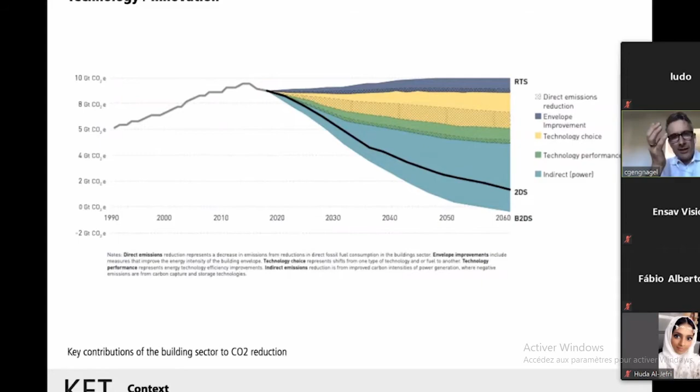That means we really have to stop this, and we have to find completely different answers for how we build human space. We really need a turning point in creating physical space. That means we have to change in an absolutely dramatic way, more than we changed 150 years ago.

And one answer is the use of technology, and one answer is innovation, of course. So if you're looking at what are possibilities to reduce the CO2 emissions, there's one answer: that technology can really help us to solve this. That's a key contribution in this challenge, as is the question of resources.

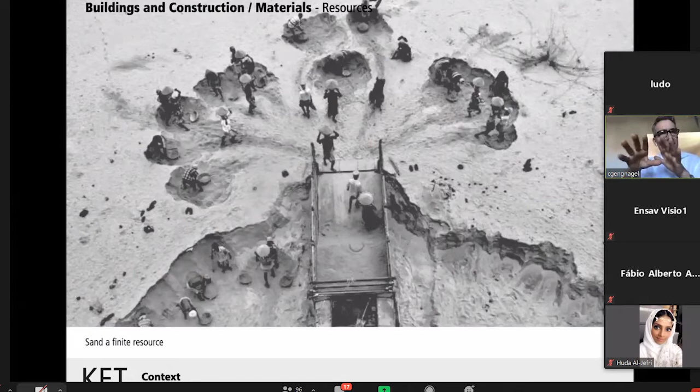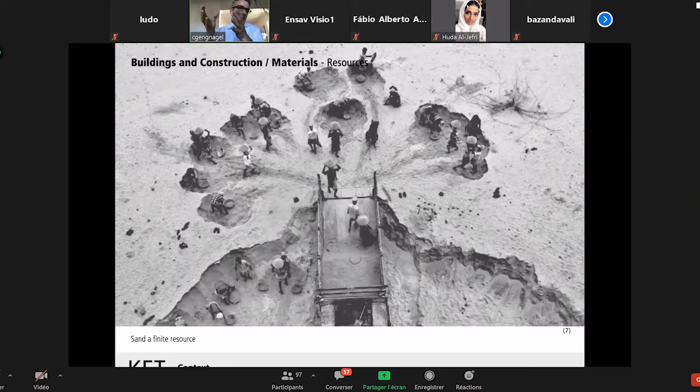If you're looking especially at concrete and reinforced concrete, I think it's more and more common knowledge, but it's still not really in our practice. I think we don't really realize in our practices at the moment that sand is a finite resource. It means we have a real problem on a global scale with this simple material, sand. It's a very present problem in the Asian part of the world, maybe not in Europe, but we have to see this as a global question, and think about how we can dramatically reduce the incorporation of sand in all this production of physical space.

And the interesting thing is that we have to do this much faster than we do it at the moment. We must become better and faster in what we do, and we have to do it right now.

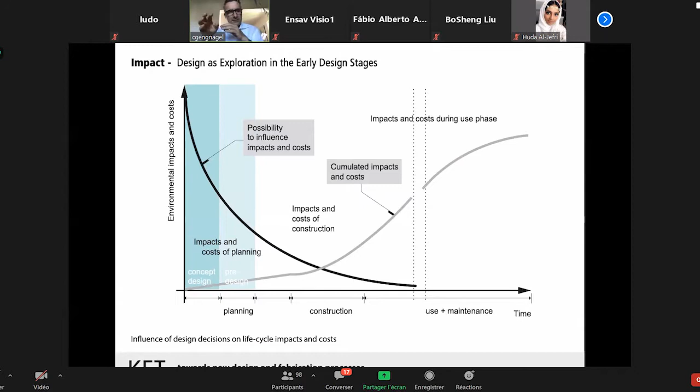So I think as an engineer and an architect, the best answer is to really change the way in the early design stage how we design buildings, because it's also quite common and well-known analysis that the impact of design concepts on the reduction of material consumption and emission of energy and CO2 has a very great impact in the early design stages. And you lose more and more of your possibility for real impact as the design process goes further, and then cost and material start increasing more and more.

That means our aim should be to do what we have to do in the early design stages. And if you're looking again at our daily practice, you can see that we are not there at the moment. We don't spend enough time in the early design stages. We're starting too fast, with design concepts not really well analyzed, starting too early with the realization process. So this is, I think, a very common problem, and this is, I think, also our idea and our hope that we can change this very fast, because it's just a changing of a process.

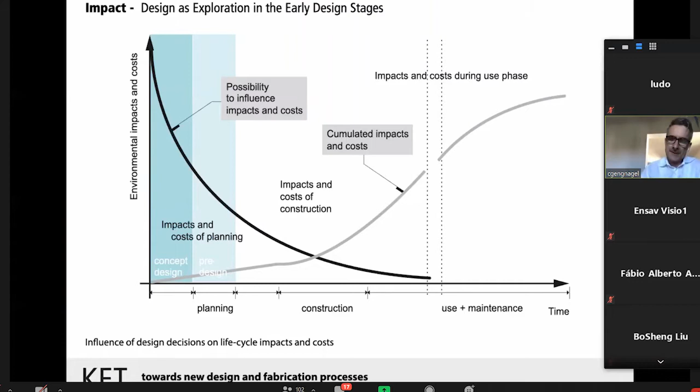The second idea is that we really have to come to a multimodal design in architecture and engineering. That means we have to use computation as a method to answer a complex network of questions at the same time, and do it in an iterative way. We have to answer mechanical challenges, climate questions, and spatial questions.

We have to create spatial quality, looking at the performance of human space in a multi-modal concept. The architectural design should be really focused on a performance idea, a performance concept of spatial performative ideas.

I think computation is exactly the right answer to come to new concepts. A third idea is that for inspiration we should look back—not only to the master builders of the Gothic cathedrals, but also to the Romans, because they developed very interesting solutions with less energy impact. They were able to build huge, wide-spanning structures using low strength material.

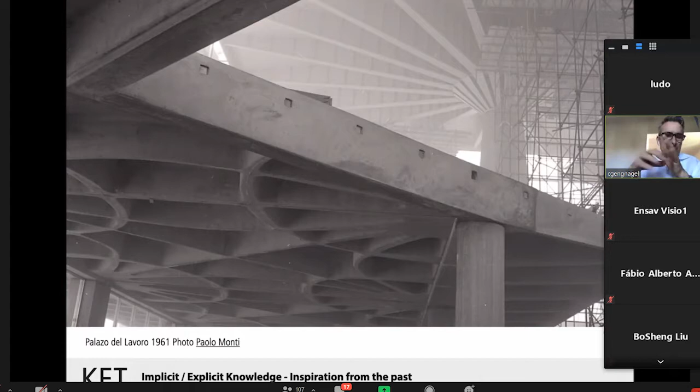He created his kind of composite reinforced concrete structure, well known from different examples like the Palazzo del Lavoro in Turin.

If you look at the idea that we can now enforce this concept with the possibilities of digital fabrication, our target is really to reinvent this concept from the architecture of the modern.

Everybody knows this very simple example: you have a primary structure, flat ceilings, columns, and foundation. It looks quite simple, but it has a great impact on our aesthetic understanding.

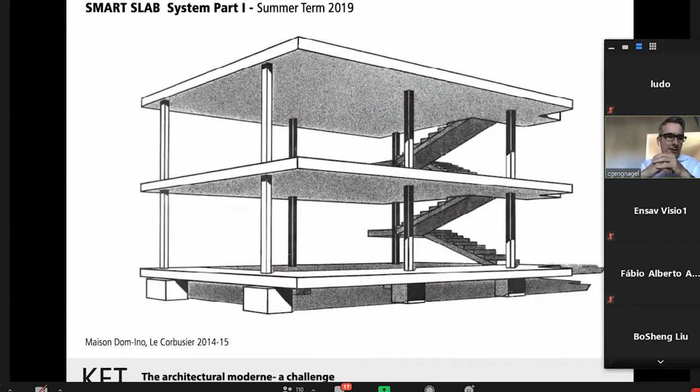What is transparent architecture? I think we have to rethink exactly this point, because this is one of the questions that leads us to this material-intensive way in which we create architecture and physical space at the moment.

One change is using concrete printing—a bit unusual for our work, since we've spent a lot of time over the last 10 years with lightweight structures, form finding methods, and so on. But we have to answer the important questions: we have to reduce the amount of material we use as soon as possible, because we are running out of time.

This was also a turning point for us, to see this as the real question we have to answer. We started working with concrete printing as well, and discovered there's a good chance to create a completely different design language.

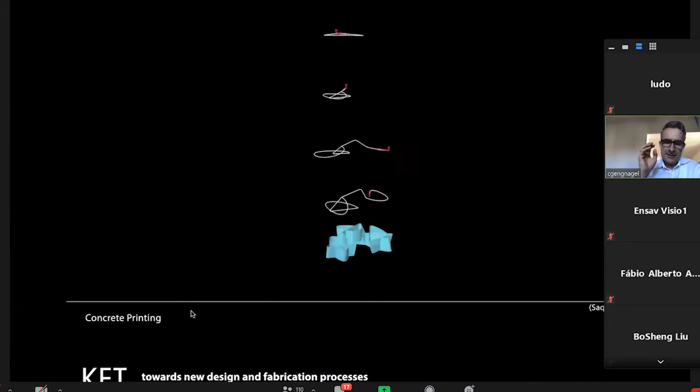But more than this, you can also use this design language to find a better structural performance. This is what we are really interested in: combining a new aesthetic language with mechanical, acoustic and thermal performance of a physical space, of the boundary of a structure.

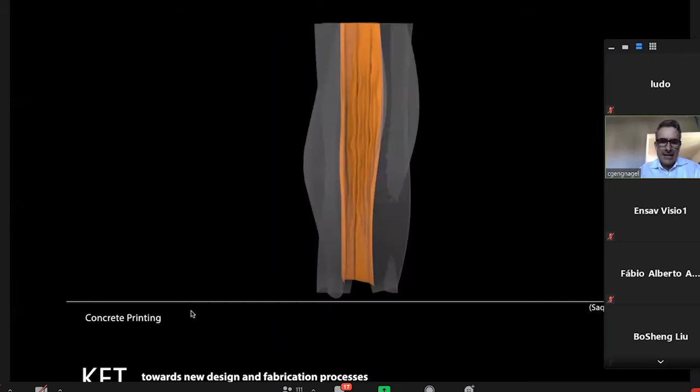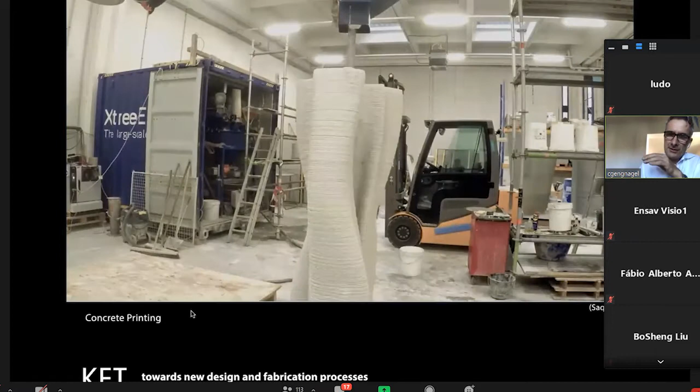Our first experiments were creating, as others did as well, concrete columns, using this possibility to create completely unconventional shapes combining a robot and a concrete nozzle printing this free-form column, which is now part of the exhibition at the Futurium in Berlin.

This led us to our challenge last summer term. We gave our students a task to develop a new ceiling system using free shape, free form. But it was very important for us to say: you have to optimize your system into a modular system, explain the construction method, and of course find a way to print it.

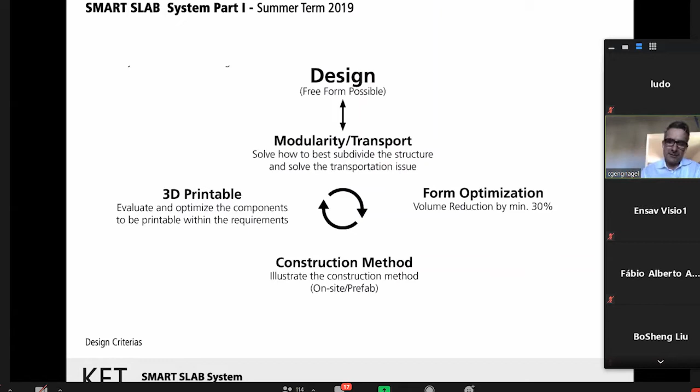In the end, the idea was that we would print the best concept or idea at the end of the summer together with the Swiss company Sika. A very important constraint from our side was that all concepts had to show they could reduce the volume of concrete by 30%. We gave this as the first idea.

The idea behind the whole thing was that we're trying to develop new thinking for this question: how can we develop heavy ceilings for buildings.

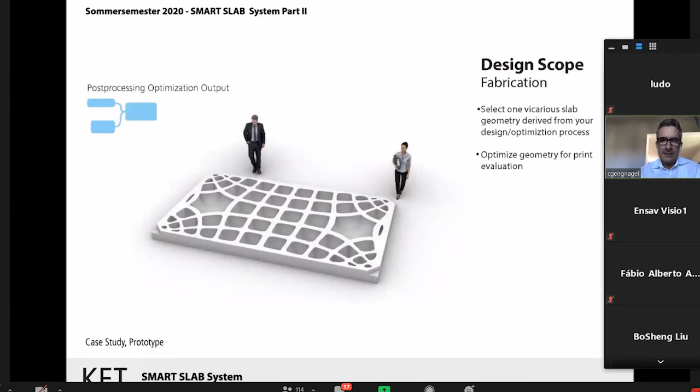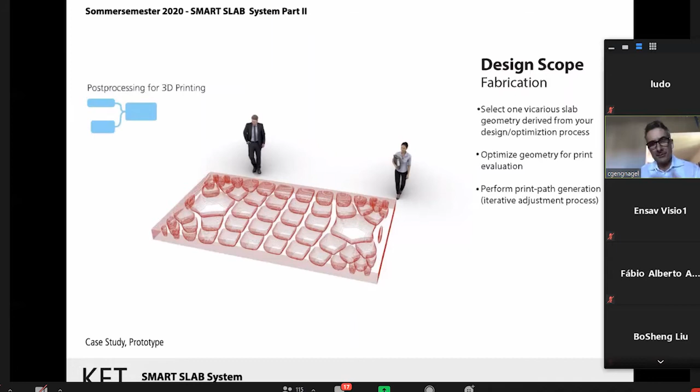We gave a lot of constraints to help the students, saying it might be a good idea to work with prefab in combination with producing this prefab maybe on site, then adding in-situ concrete, to reduce the mass and volume for transportation, finding a new kind of hybrid manufacturing on site, a bit following the idea of Pier Luigi Nervi, who did this as well, but just with human forces.

So this was our introduction for the students, and in the end we had 8 teams developing different schemes and concepts. These are the top 4, I would say. Let me show you a bit how far the whole process went.

So the students, this was one of the groups, you can see this on the right side above. The group developed this, I would say, a very simple and robust concept, but we were super impressed to see that they tried to solve more or less all the important technical issues with this architectural design.

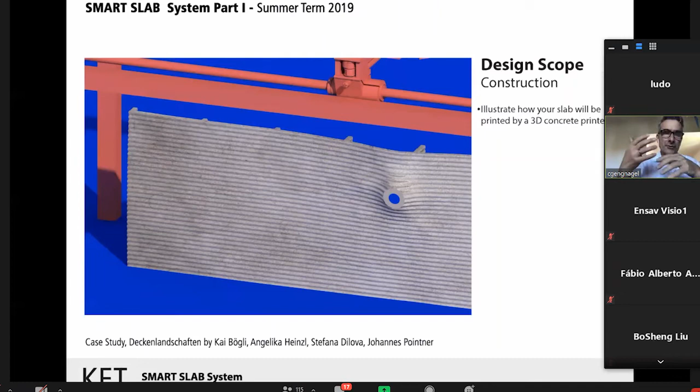One very important point was something we developed together with Sika: we have to print a ceiling in a vertical way, because to have the option to develop a shape, you can't do it on flat ground, since you'd be relying on gravity forces on the printed concrete. To have more flexibility and design freedom, we developed the idea to print in a vertical way.

The students adapted this concept, coming up with a basic idea, maybe following a bit the concept shown at ETH as well, with a more or less free-formed underview of the ceiling and ribs above. But in our case, it was very important to develop the system so that we don't have reinforcement in the ribs, just on the top of the ribs, so the whole thing can work under compression, with tension just in the upper layer of the structure, of the ceiling.

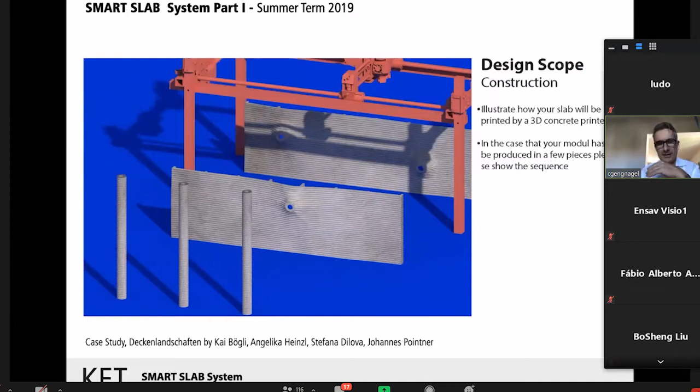Another important task was that all parts could be transported and assembled on site, more or less with less technology. You can see the level of detail here.

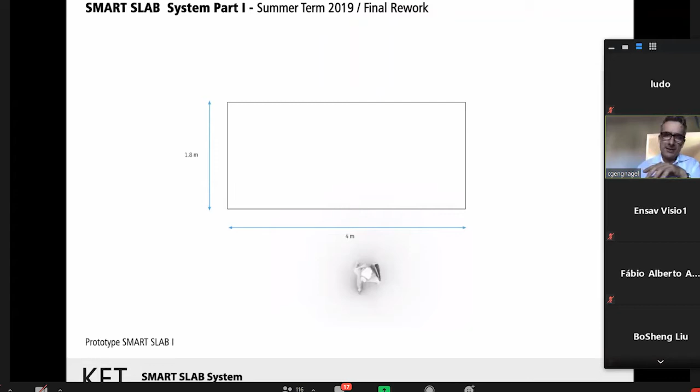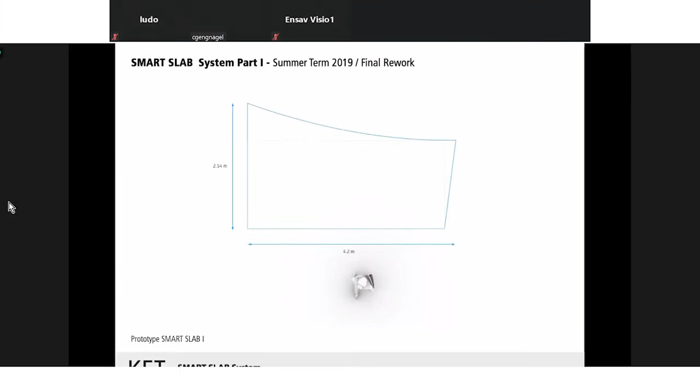We tried to bring all these 4 concepts together in a kind of final rework with all the students, for our final prototype that we would like to print with Sika. We changed the boundary conditions a bit to make the experiment more fruitful, to show that we are able to print something with a shaped boundary. So we switched the design from a rectangular floor plan to a more or less free-shaped floor plan, more as a challenge for us than for other reasons.

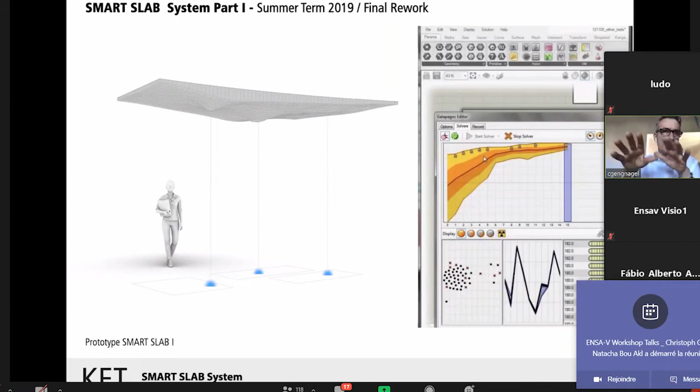Then we came up with the diagrid to develop this idea of the ribs a bit. We did some structural analysis, shown here now, using Karamba, which we train our students to use and use ourselves for exactly this kind of experiment or design development. We did some topology optimization, on a basic level, just following gravity, of course. So the final shape of the whole mock-up was developed through this, I would say, quite simple topology optimization.

And this was the final result. The final challenge was really to develop a printing path. It's a bit like always, you can create form and shapes, but this is not the question. The question is, in this case, I think this is super important also for the future, that we really think about how we can build this, how it's possible to fabricate this.

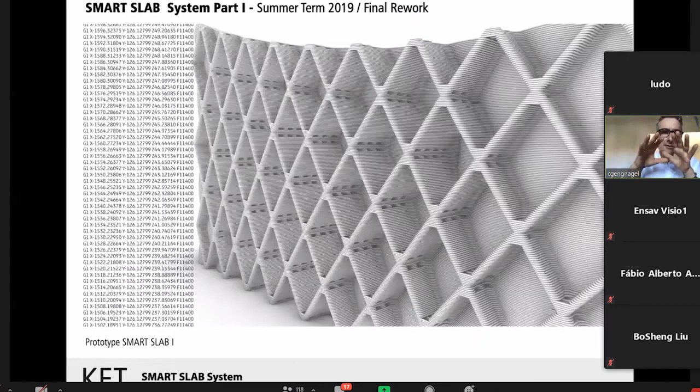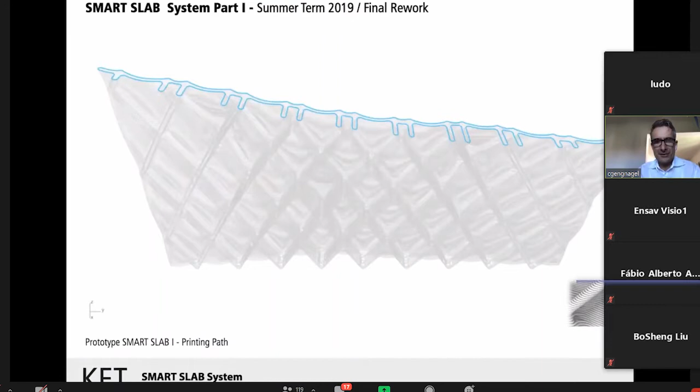And therefore you need some practical experience, of course. This, I think, is one of our biggest challenges for the future: that we can use a lot of digital tools and digital processes, but we still need physical experiences, implicit knowledge if you want, to come to the right solutions. In our case, it took us a while to develop this printing path concept using different speeds, and using this underlying weaving concept to create with one nozzle in one go, with different speeds, this shaped boundary and this diagrid. So now it looks quite easy, but it took us a while to come up with this solution. And finally we were able to print a first scaled mock-up.

And now we are looking forward to develop this concept further. We will try this summer to incorporate acoustic optimization as well, to really come to this multimodal design state that we are looking for. And then we will do a full prototype.

And again, this is a very complicated and complex process, because you have to make sure that the prototype, under construction, is stable under gravity. It should be strong enough without any reinforcement, and stable under construction as long as the concrete is being poured into the lost formwork. That means this is just a game of gravity, and then finally we'll add on top the reinforcement to reinforce the whole structure for asymmetrical loads and so on.

So I think this is still something that is not completely solved, but we think we're on a good path. It's quite amazing how far we are now with this technology, to create in a very short time quite complex geometries, and to start again to think about shapes, geometry and texture in reinforced concrete structures. That means complex geometry, but we still don't have to solve the formwork question, because we can create this in one process, with one material, formwork and final structure.

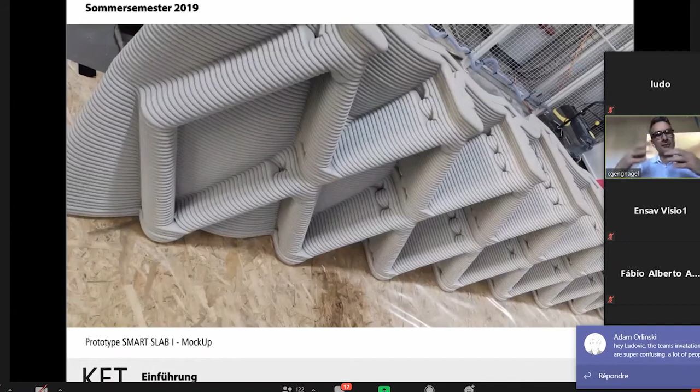And we hope this will lead us back to the possibility to really create a structure that answers a lot of questions, not only gravity.

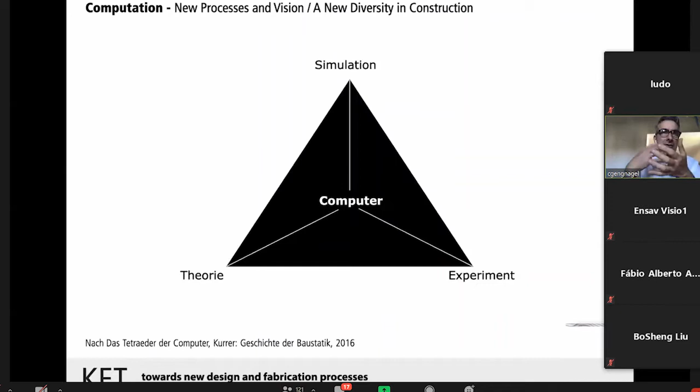And I think this is my last point. It's super important that we really start to do what the first pioneers of computational design were saying: that computation is made for simulating things, to do experiments, and to create a really fruitful combination of simulation, experimental work, and theory. And this will lead us, I believe, very strongly to a new architectural language and new possibilities to answer the challenges that I mentioned at the beginning.

And of course, the computer shapes the process. This is a quote from Argyris, one of the computation pioneers from the 60s. And I think it will change our processes quite dramatically in the next few years. So thank you for your attention.

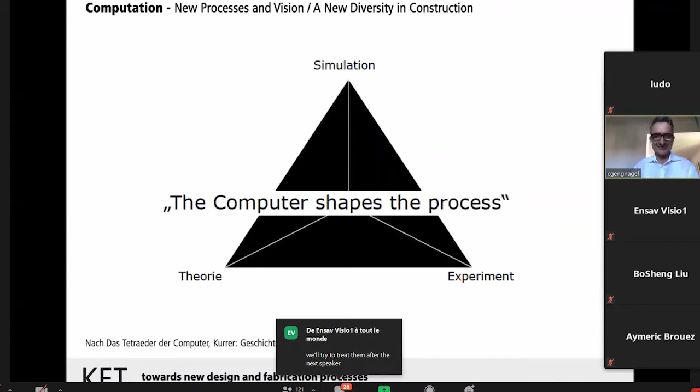Yes. So then we'll pass on directly to Alexandre, and it's very nice because you're both talking about experimentation in the academic field, which will also of course raise questions like Mette did yesterday evening on what is our role in the academic field and how do we treat it. What is the experiment? What is research? What is the student's role? What should we be as next teachers, or what should the students be learning? Should they just be learning tools? So I think there are a lot of things that come back into your presentation. And Alexandre is, of course, an architect, trained at the ESA in Paris.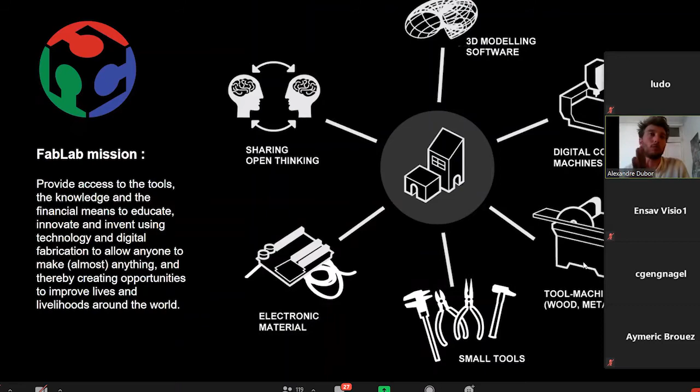This Fab Lab network now is huge, with more than 1,600 people around the globe pushing these ideas. We have Fab Lab Barcelona, which is a bit bigger, very focused on architecture, while we see that this technology can apply to many other fields.

But I think it's good to put this in the context of what means architecture. I see some chat going on, let me just remove this two seconds. I'll put it in the bottom. Okay.

I think you've seen already a lot of presentations previously, so I will not insist too much. I just want to focus on what's changing for architecture. We're integrating more and more digital technologies, allowing us to manage complexity in the most extraordinary ways.

We were initially inspired by other industries. We didn't invent any of this technology; we use them from others. For example, Aerospace was the first one—the first softwares we could integrate really easily to develop a building streamed from design to fabrication. In this case, it was the fish sculpture by Frank Gehry in Barcelona. That was one of the first BIM integrations, but it was coming from the aeronautic world. So therefore, the language, the shapes, the cuts, the definitions were coming from this world.

Today, we are trying to reinvent our own—the one of architecture—with our own set of tools, our own set of people. Everybody speaks about BIM, but nobody agrees on what should be in this BIM and how we should actually deal with it, especially when we go out of the traditional standard buildings and start to innovate and be different.

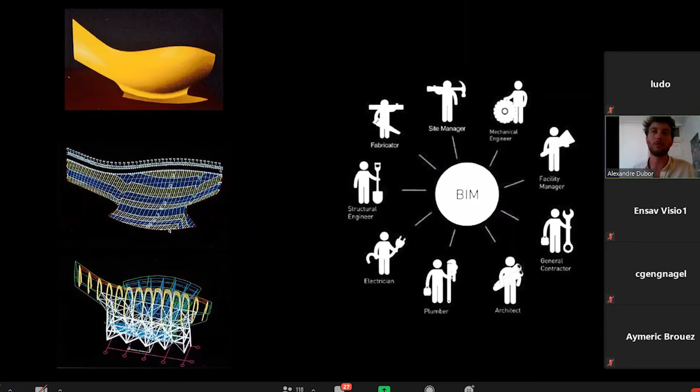So we believe that we shouldn't let others define the software for us, because we think that's the core of these elements—and not only software, but a whole set of mechanisms. We want to feel comfortable with this technology, and what's really incredible is that today's new generation of architects, engineers, designers, but also industrials, feel much more comfortable with coding, with scripting, and with managing data and flows of information.

So this is part of the context we have, in our context of IAAC in general, but I would say worldwide.

Also, we have more and more access to technologies to fabricate, and that's also very fantastic. It's more and more common to have a laser cutter, CNC machine, or 3D printing in the School of Architecture, but in general in small laboratories around the world. Same with robotic arms—it's starting to spread quite impressively. I think the Robots in Architecture Association mapped more than hundreds of these schools around the world, and I think these numbers are growing.

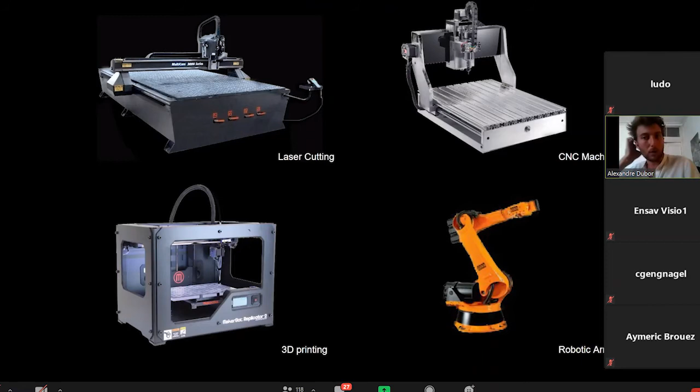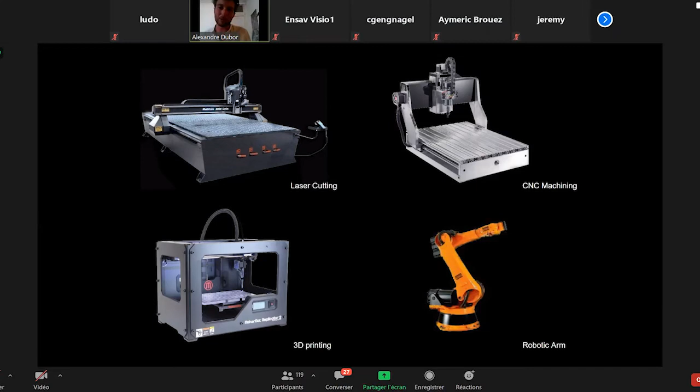We're a bit peculiar in IAAC because we started 10 years ago and began to have a huge panoply of very large scale elements, and we started to apply them to a set of projects. We explored a lot of what could be done. What is interesting is we promote this methodology of actually getting access to the technology, getting comfortable with it, and starting to produce projects with it.

So I wanted to show you a couple of projects of how we can use them. Some are a bit old, but I think they're good examples—for example, how we've been using simple laser cutting to streamline this idea of origami shapes for a restaurant close to our school, where we could actually eat often. Very good friends. We decided to finally redesign entirely the roof, the walls, the furniture, the tables. Everything was done with CNC and digital fabrication.

It cost us a bit of time to develop, but now these are released in open source and allow any shops or restaurants around us to actually ask us for any origami shapes. I think in a matter of hours, we can model it in 3D, just these planes in space, and we already have all the script ready to detail all of it, lay it out, cut it, and be able to install it just two to three days after we had this meeting about the space. So we have this embedded knowledge of the design of the shape that we can share and construct on top of—it's really impressive.

In this case, a very simple project, but successful still, we were able to change the depth of the origami according to the acoustics. Close to the kitchen, we wanted a bit more depth, so we tried to create diffusion of sounds in one direction, while in the other direction we tried to keep it more flat to get more space to ventilate. This is how we can deal with design architecture while understanding fabrication constraints in a very simple project, and you can imagine how this could be used in many other contexts.

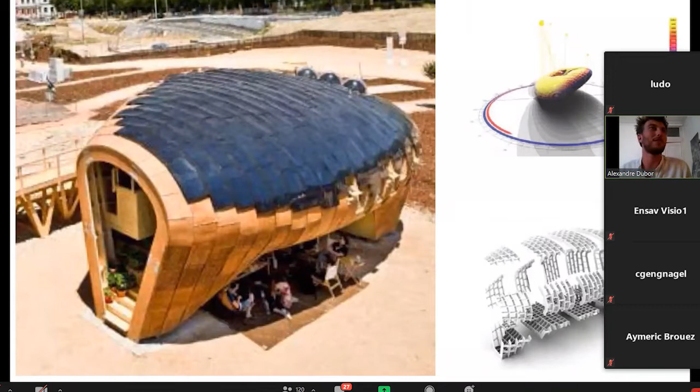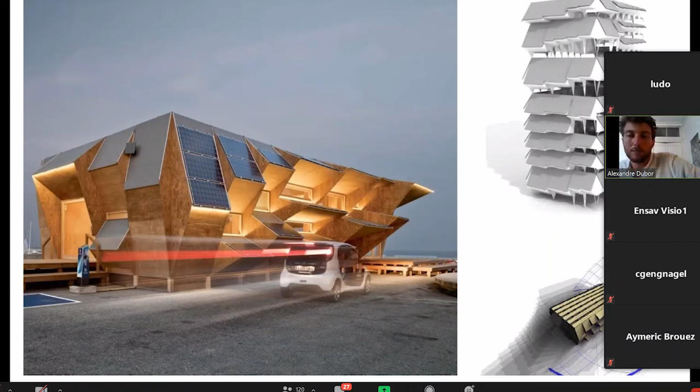In this case, we also demonstrated that you could optimize the shape according to the location given to the algorithm. You could choose which country you live in and the shapes would adapt to that, as much as you could choose how many square meters you want, etc. We actually won the public prize for this, but not the first prize of the project. Nevertheless, we got more people interested in how we can integrate design, performance, and sustainability into a more modern architecture.

How we can use advanced technologies to develop new types of architecture thanks to this. So this was the second version, maybe more about density in the city.

We're looking here at the pavilion developed for Endesa for the smart city exhibition. This was a control center for Barcelona, installed for 5 years as a temporary building in front of the beach of Barcelona, really in the center. It's a very good example of how you could have a simple script negotiating views through the windows while managing solar gain through these folds, all detailed down to the connections, so the CNC production is streamlined and very fast.

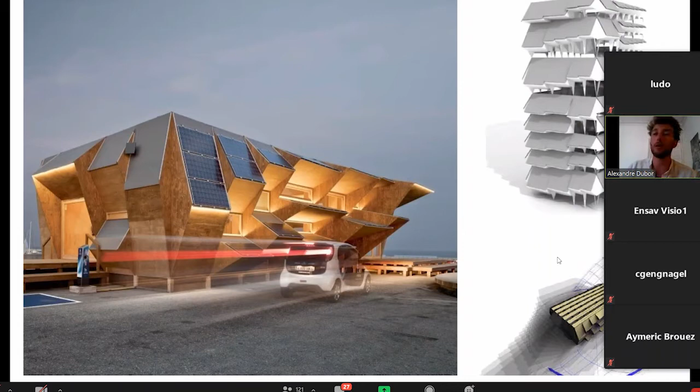So this development could now be spread really easily to an entire building. There are many other projects—I won't go too much into them—but there are possibilities from the software to actually optimize geometries, optimize matter, reduce overall impact, and fuse this performance-based design from engineering with the classical tools of the architect to understand space and elements.

I think it's very interesting how we can combine many ideas within this. This vault was done thanks to RhinoVault developed by ETH, but also by locals from the Catalan world in Barcelona who invented these thin Catalan vaults, as we call them.

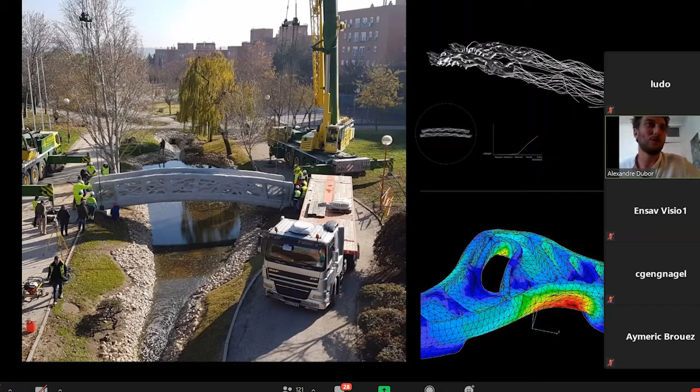We also worked with Acciona to 3D print the first pedestrian bridge in Madrid, together with Enrico Dini. Here we looked at topology optimization, even though the technology was still at the beginning, so the resistance of the material wasn't there yet, and it's not so thin yet—but hopefully that has already changed by now.

We've also been exploring other types of single-line material extrusions, more for thermal performance and ventilation—how we can integrate those performance aspects into the system thanks to this kind of collaborative tool.

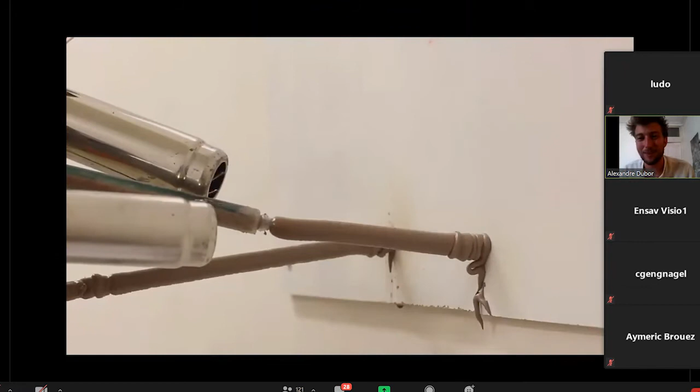A project that made us famous for the use of technology is one where we pushed the boundaries of the limits of physics. In this case, after about 5 years at IAAC, we worked with a novel type of 3D printing, always fighting against gravity in the fabrication process. This project was developed by Sasha and Peter in collaboration with Joris Laarman Studio.

Synthetic was pushing the limits of what we can do with robots—if we tune the material, if we tune the design, being able to have full control of these systems and create new geometries we couldn't see before. Quite exciting moments.

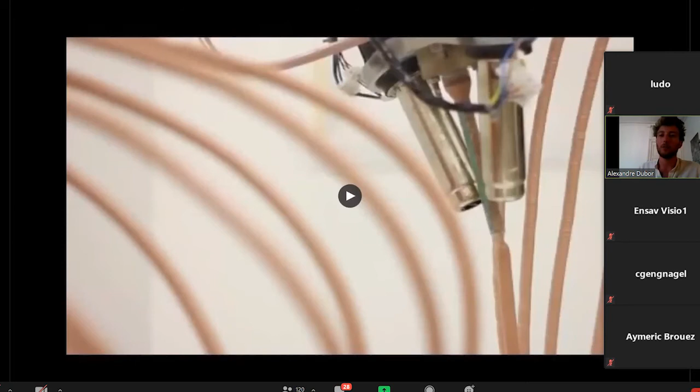But this brings us back to the question: why are we using all these technologies? Is it just because we want fancy buildings, because we want fancy shapes, because we always want novelty?

We love this citation from Cedric Price that mentioned technology is the answer, but what was the question? Often we are a bit in this situation where we all want 3D printing, we all want robots, but sometimes we forget why. So that's a bit the focus we've been taking as researchers.

Now I will show you bits and pieces of research we've developed at IAAC that haven't necessarily resulted in entire buildings yet, but should soon, going on a journey to rethink digital fabrication and answer some big questions in construction, where there's still a huge lack of adequate housing. We're still emitting a lot of CO2 and the building is energy consuming just in use. These numbers don't even account for another extra 6% of worldwide CO2 emissions just to construct the building. So a lot of savings are possible here.

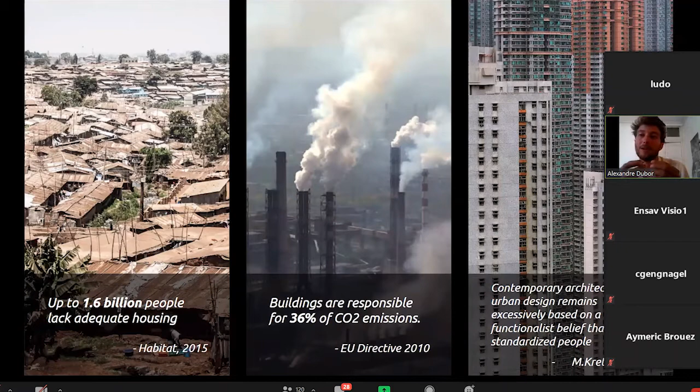In general, we want to avoid the answer of mass-produced buildings that we kind of fear, the kind of architecture and cities we've seen especially in Asiatic countries, and hopefully won't happen again, but might in Africa. We want to propose a more fine-tuned architecture that adapts and is customized. We're looking at the possibility of this technology to deliver fast, cheap, sustainable construction, especially customized to the client's needs, to the culture, to the location, to the site.

Here we've been pushing the logic around these elements, together with the FabCity initiative, which we've succeeded in making more than 20 cities and regions around the world sign. We want to push this digital technology to be more sustainable, helping the circular economy, where finally materials could be fed back at a much more local site. So trying to move out of the linear movement, linear economy, where there was too much trash, and into a circular one.

You can recognize the Fab Labs here, and we believe there are different scales of operation. For objects, for design, probably a Fab Lab would be a good size. And if we look at larger construction, like buildings, we've tried to make a building out of a Fab Lab. We don't necessarily recommend it, it's quite difficult. We believe there will be a lot of potential as well for small and medium enterprises to go into Industry 4.0, using these digital technologies, but not so much in a do-it-yourself way, more in a professional and specialized way.

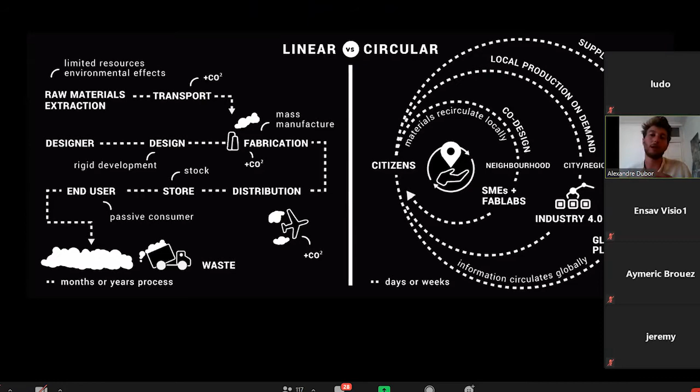The idea in the end is to try to avoid this transit of matter globally, but think about more global exchange of data. So more at the global scale, trying to avoid this.

So what is this Industry 4.0? I think you already had a talk with Achim Menges, so we won't go too much into detail. But these ideas of new technology are changing the world. Mainly, I'll simplify by saying that we now have connected devices, connected information, not isolated, specialized information. So we've developed systems, open source, based on ROS, which is a robotic operating system, that allow us to integrate open source academic ideas into the industrial world with heavy duty machinery that is normally really closed source and difficult to enter.

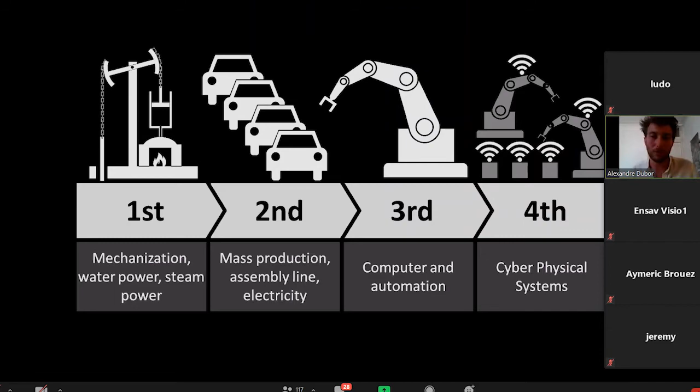But it certainly allows a lot of communication, and during the pandemic we've been controlling the robot from our house. So at home working, and the robot being in the labs doing the experiment for us. We could control this through cameras, we had new types of interface. So this is a really interesting mode and moment to be in.

But what this means in construction, we believe, is new interaction between the core elements of what construction means. Here I simplified it a bit in this diagram, thinking that it's actually about relating design, machine, and materials together in a more symbiotic way.

It will cost us a bit of change in the way we think, produce, and adapt. But I want to show you a couple of examples that go in these directions. To simplify, one way of looking at it is to imagine a robot that actually produces some object, with sensors that feel these materials and can reinform the process.

So maybe it's not exactly what you plan. We have an algorithmic design behind that adapts to this information, a flow of information it can deal with and adapt to. The machine becomes a mediator constantly in flow with the information. While this diagram seems simple, it's absolutely the opposite of what's happening today in the industry, where everything is really standard, pre-planned, and pre-thought.

So there's no margin for errors, no margin for different types of material, no margin for natural material to be heterogeneous. Many questions and knowledge have been disappearing in the name of standardization and mass production. We know the circular economy will have a lot of problems recycling products if we want to fit it into the traditional mass-produced industry. We need to make it more flexible to the material.

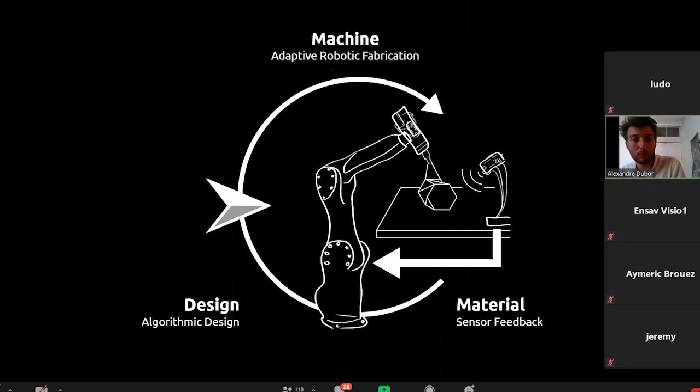So we've been doing a couple of projects around this, and I see I have still 9 minutes to discuss quickly this project. I'll go through it quickly.

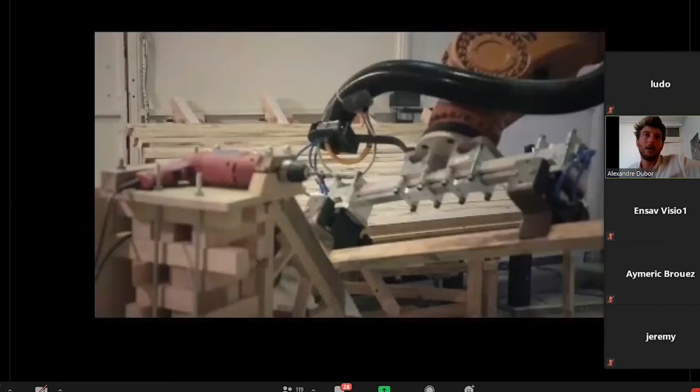To start with, a very simple type of fabrication process is linked to pick and place. A robot can easily take an object and process something. In this case, we're looking at a very simple circular saw that's able to cut a piece of wood and place it into a space on the side of the robot to assemble.

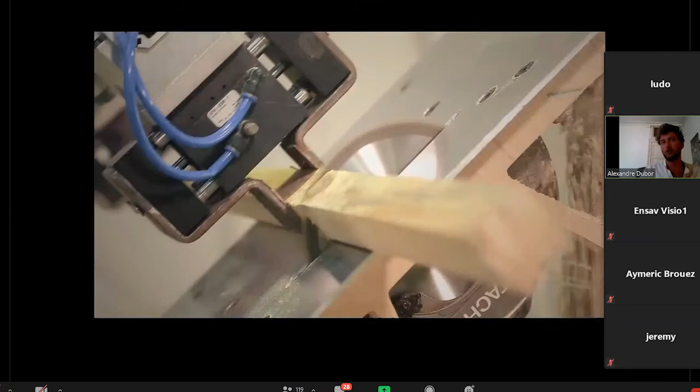So just pick, process, deposit is something very classic in the industry, but generally it's the same process repeated millions of times. My cell phone gets its 5 screws from a robot, then moves to the next line where another robot takes the next step.

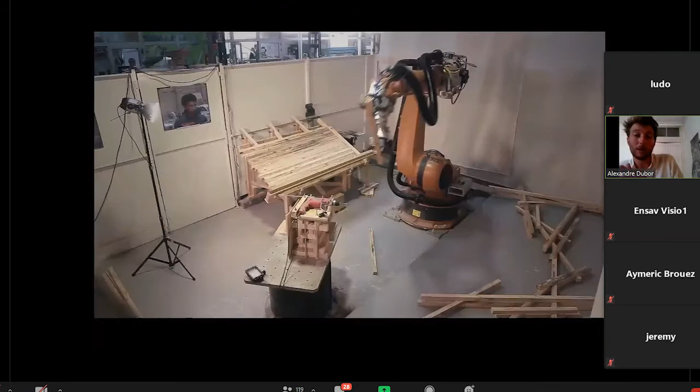What's happening today is architects have the potential to program these robots for customized elements, so each piece can actually be different in this process. What we've done here is take advantage of the flexibility of the prepping, cutting and assembly.

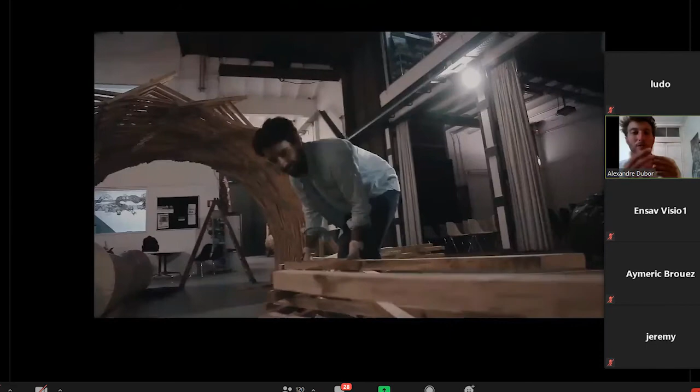So that we can deal really quickly with wood that normally would be discarded. This was wood ready for pallets, not good quality because it came from trees in Spain that aren't as straight as those in Austria, because there's too much wind, too much valley. Basically, the wood is not considered good quality for construction.

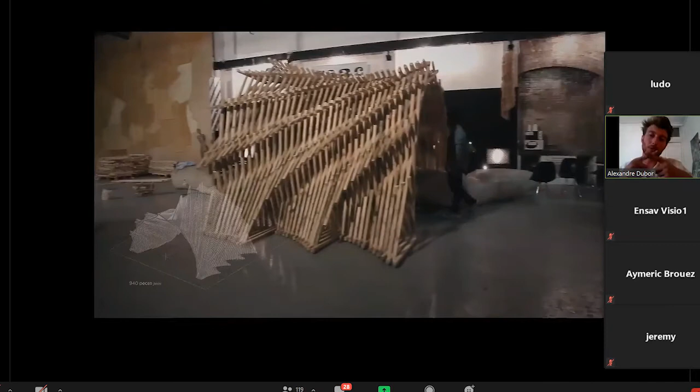But they had a really nice trick: assemble the elements really fast and let them dry in place in a wet state. So we used the robot to produce this pavilion very fast, in less than a day and a half, stacking all these elements in a very redundant shape.

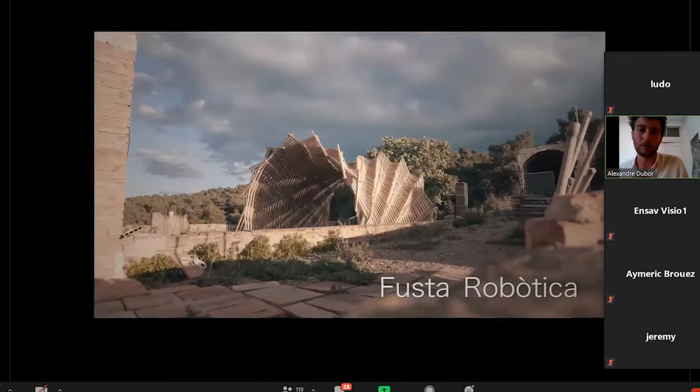Where each stick is maintained by at least 4 points, so that even if you try to twist it, it will actually lock the entire shape. This allowed us to use material that's super cheap, that was going to be used as waste, into a building element, because we were clever in the design, understanding how to make the fabrication process more flexible and adapt to the material. But this was us conceptually adapting the system to the materials.

We can go to another step in this process where we actually start to scan and understand what kind of tree we have in front of us. In this case, we even try to scan it before trimming it into pieces, to understand where we could place and cut with a chainsaw, a small detail, a small assembly.

How can we streamline this process so that you don't need to process the entire log into a straight beam and then recut that beam into complex geometries, but instead acknowledge these complex geometries and use them directly in your building. We've done many experiments like this, discovering it's quite easy to integrate sensors, not necessarily in front of the robot, but sometimes we fly drones directly in the forest to pick the right tree and understand what was happening.

There's a huge amount of data we can track from satellites all the way to us with field surveying the elements. At the end, we can store it in a database and stream this information into the design process so that we can choose which curvature we want where.

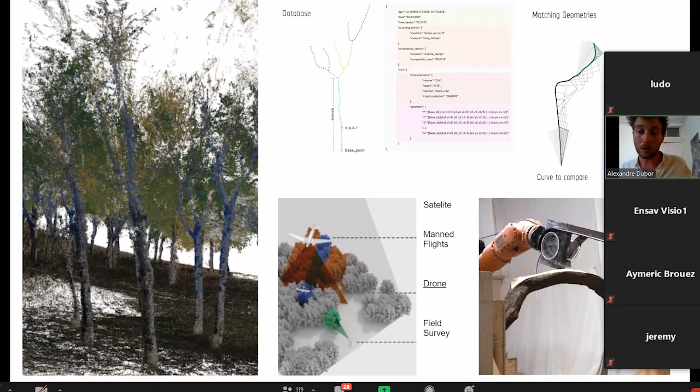If you're interested by this research, I invite you to look at the wonderful work happening in Hooke Park, where they've been doing this for many years, very interesting, specialized in wood.

But there's ways to look at it, not only at trees as something natural and complex, but also at waste as something ever changing, not streamlined, not really well organized. We could use robots to scan, process, pick, and sort them in such a way that it can become a building.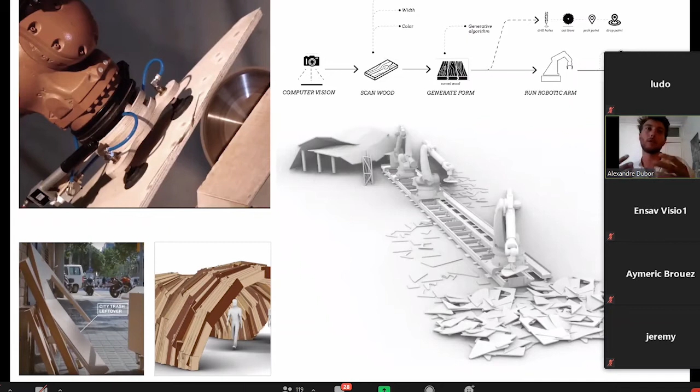Actually, this is research that has been going on for more than 3 years, where we've discovered plenty of different algorithms to adapt, scan, process, pick, place, cut quite complex elements that I will not go into detail now, but that brings very interesting feedback.

The last iteration in this process was actually not having the robot process the wood or elements, but sending the robot on terrain, on the site, to see what could be salvaged from a building, how we can process and extract material before we even take it out. We already knew what a building contains, which kind of information we can extract.

Here we've been collaborating with a startup called Scaled Robotics, specialized in digitalizing building sites, from two IAAC alumni, with whom we work really well in digitalizing this whole environment.

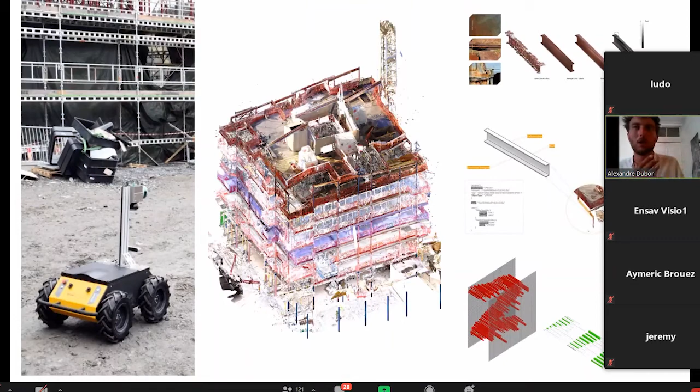So how can we actually design with these tools and integrate it? I'd like to keep it a bit open because we don't have yet the directions this can go, but we believe there's a huge future to start integrating building elements, recycled elements or pieces of furniture into our buildings, because we're able to give more freedom and flexibility to our design as well as to the machines. That's one line of direction we've been exploring recently.

Another line is more linked to 3D printing, and I'll go really short because I've seen you already had a lot about 3D printing before. But we believe there's so much to be done here, and we've been inventing really weird materials mixed together with our colleagues.

For example, this bioplastic with IIT, the Italian Institute of Technology, very specialized in biomaterials. We've been looking at the right way to recycle orange peel or coffee grounds into a bioplastic. But again, here we try to be clever. The material in this case retracts a huge amount—I forget if it's 5 or 10%, but it's quite a strong element.

Instead of fighting against this, and trying to fine tune with the material, we just acknowledged it. We accepted that when we print flat and let it dry, it starts to go into these double curved shapes that we found very interesting, so we started to design with it. We trace lines, compose with different types of material, and try to find this new mechanism of designing these very efficient double curved shapes that came naturally from this drying process. There's still a huge exploration to be done here.

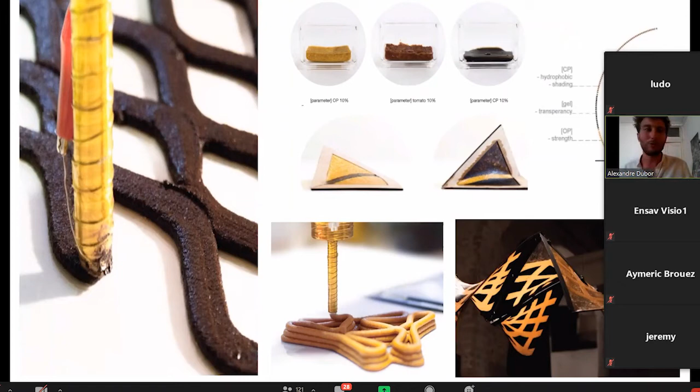But the core of the research we've done over the past 8 years was around this first project developed together with Enrico Dini of Pylos, 3D printing with earth, initially really dense in clay, and slowly we started to discover how, with a couple of additives and aggregates, we can actually improve the material earth that is quite known.

We're speaking about building technologies that exist for more than, I don't know, maybe 4,000 or 5,000 years. The oldest building, I'd say, is 5,000 years old and still standing. A third of the population is still living in earth constructions. But there's still a lot to be done to industrialize the process and make it more modern.

So we started to develop the mix. We also looked at ways of developing new robotics for printing on site.

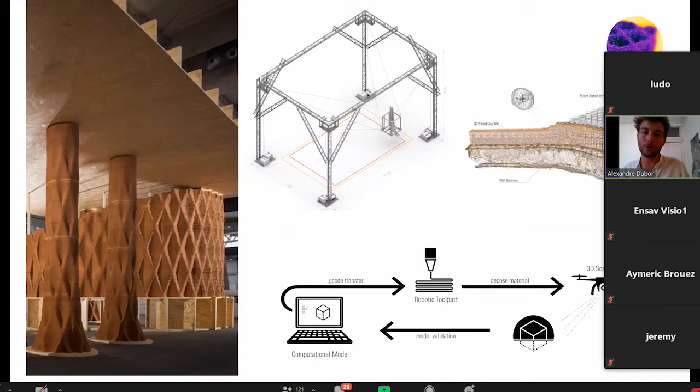So here's a collaboration with Tecnalia on cable robots and how we could have these huge, massive printers that we can easily assemble and disassemble. It costs us one day to assemble, disassemble, calibrate, and start to print. We also started to integrate drones to scan this huge scale and get feedback about how the material behaves and if we are precise. These have been very interesting explorations.

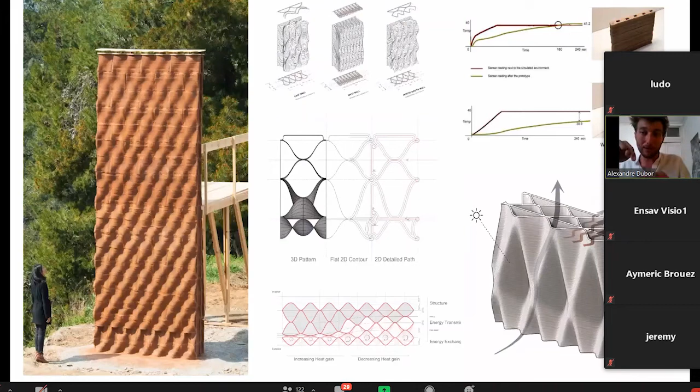Then we started to look at what this means for architecture. How can we look at all the details, how we can connect with the wood, how we can connect with ventilation, how we can put the insulation, how we can make prefabricated elements or print on site, how we can lower the temperature by being more efficient in how we distribute the wall. The architect is certainly preoccupied by how we design the inside of the wall. That is something very interesting.

We've also been collaborating with WASP, a wonderful company trying to save the world, World's Advanced Saving Project, in Italy. Together with them we're looking at the possibility of printing on site with this kind of crane, where we've also been looking at new types of details, how we can make a straight wall, how we take stairs - actually not so easy - how we deal with gravity, how we deal with problems of construction in this new realm.

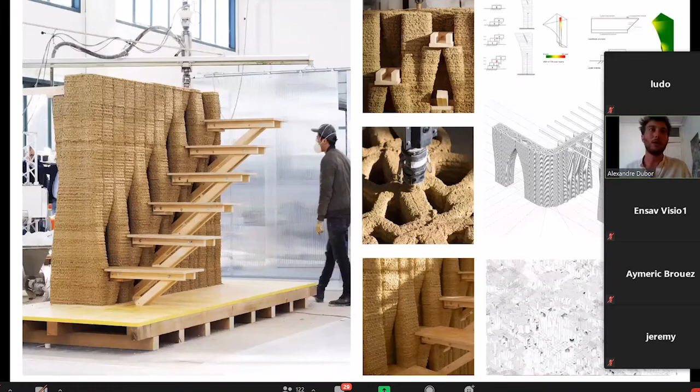And we've been developing a lot of methodology. Now I see I've run out of time a bit, so unfortunately we'll have to accelerate. Just to mention that we have all types of materials and experiments. I wanted to show you quickly a small video.

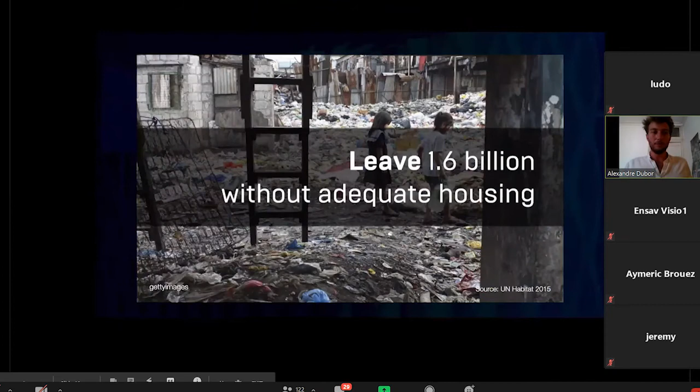About what we've been doing at 3D printing. I have a doubt if you can hear the sound now. Maybe not, I don't think so a little bit. Yeah, we hear it, we hear it. You hear? Yeah.

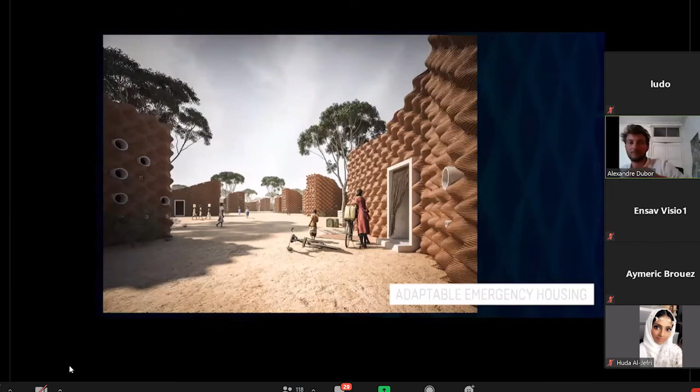Can't hear you, Alexandre. This video's sound is better.

So just to conclude, if you want more information, I really invite you to see the nice work of our students this year, who are all touching similar topics and trying to explore where we can go with technology and architecture. They will be presenting this Friday morning, maybe a bit short for you during the workshop, but I clearly invite you to have a look. It will be publicly shared.

Okay, with this, I say thank you for listening, and also thank you to all my collaborators who allow me to make such amazing work together with them. I'm open to any questions if you want. Thank you.

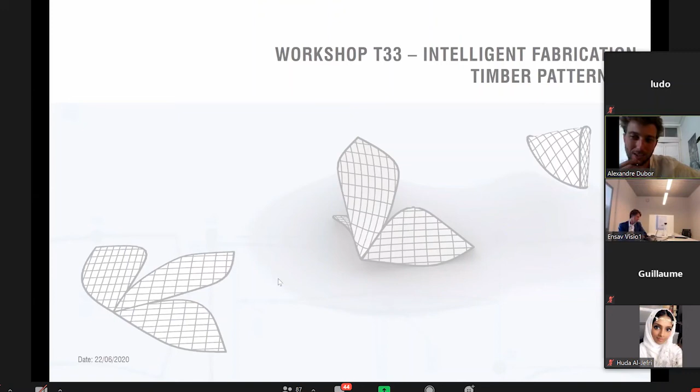So not necessarily more money. Agree, to make business sometimes it's a bit more rough, but we have the chance to be in this academic research environment with industries that came to us because they also want to be part of these positive changes. So hopefully we can create more and more this consortium, especially in Europe where collaboration is easier, that our strengths come from speaking to each other, sharing, constructing, and making it happen. Because the enemy is not between us, it's the people who don't care about energy and just want to make money. So I think there's potential to change this.